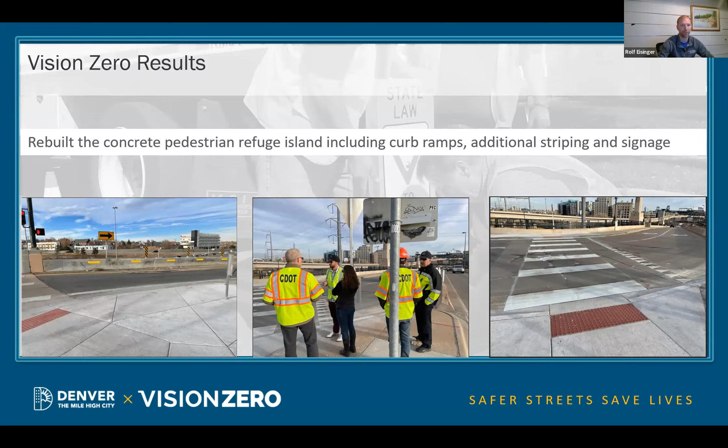In addition to that, our photo enforcement program led by DPD currently has had a significant increase in safety. The new bill that is out, or law, could provide even more opportunity to focus on some of those higher speed roadways that we haven't had the opportunity to deploy this effective countermeasure on.

Reflective backplates - this is a low cost, I'd say, safety improvement, but nonetheless helps increase visibility for traffic lights, especially at night, and especially if the traffic light is no longer working. Motorists can still see it, and pedestrians and people riding bicycles. It is a FHWA proven safety countermeasure.

Jumping into the action plan here, with Denver Moves Everyone and all of the public involvement and the planning that went into creating that document, we used it as an opportunity to align planning efforts to update our Vision Zero action plan. Denver Moves Everyone helped us seek quite a bit of public input, which led to the recommitment of Vision Zero, and zero is the right number.

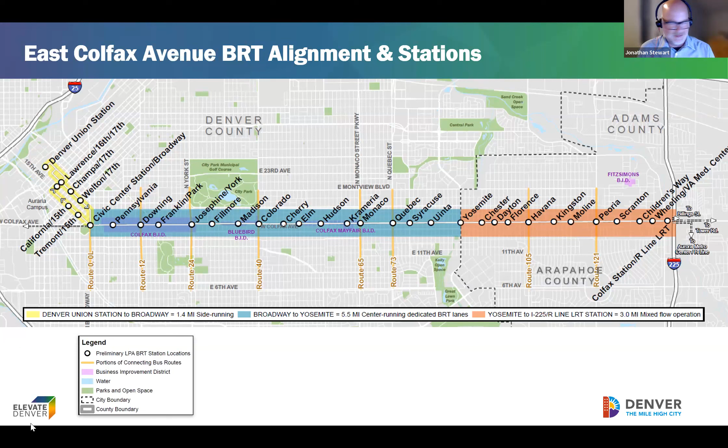These are some of the key features of having a bus rapid transit, and these are all different improvements to help a bus move faster through a city. All of these little things add up to lots of savings, about 30 minutes of savings time if you're moving through Denver. One of the big ones is called transit signal priority.

There's a little device on the bus, and when it comes up to a traffic signal that's getting ready to turn red, it will hold off on turning red and stay green for just enough time to let that bus get through the traffic signal. That helps to speed up the travel time.

Also, there's level boarding, so the bus stations are elevated up. There's BRT branding. Fare collection happens at the bus stations instead of on the bus, so that allows people to get on and off a lot quicker. We have bus-only lanes, and the plan is to have specialized vehicles as well—we're going to have the 60-foot accordion style buses for this line.

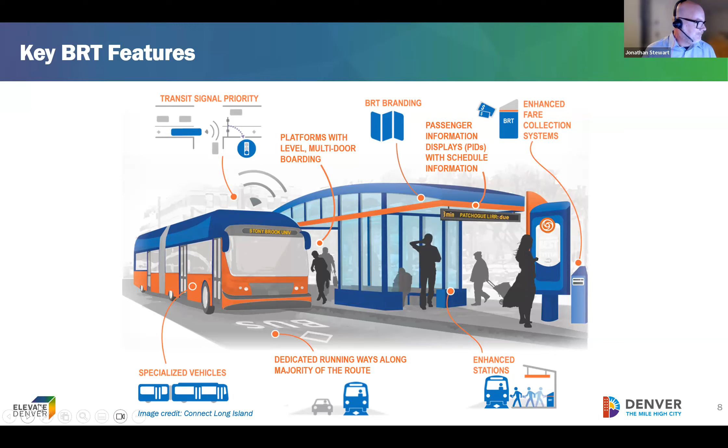Let's move on. So the Colfax Bus Rapid Transit Project is the first of several BRT lines planned in the area. We have Colorado Boulevard, Federal Boulevard, Alameda, Spear, and a number of others.

I know that Colorado and Federal are being prioritized—those are next up to get built. I think maybe Federal quicker than Colorado, although we'd have to ask our friends at CDOT for that specifically. But this is part of a plan to prioritize transit even more in the Front Range area. Let's go to the next slide.

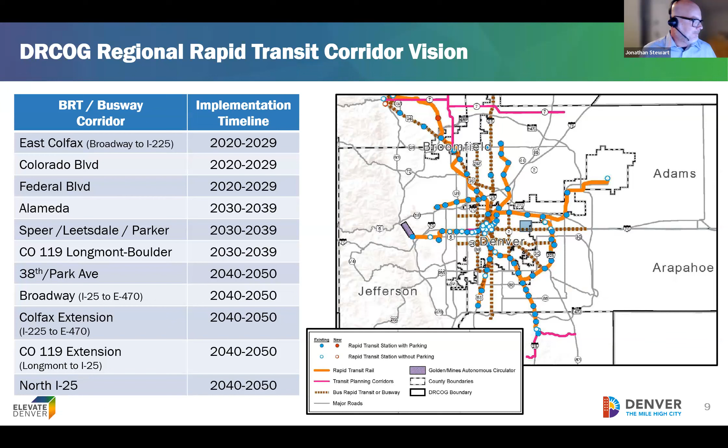So where is this project specifically, the Colfax BRT project? We've been working pretty hard going through an FTA funding process. We identified the ability for this project to join the Small Starts program by the Federal Transit Administration, and as part of that we had to go through an environmental review—that's what the NEPA review is called.

We're still going through that process now. This past August, August 2022, we turned in our rating application to FTA, and in March of 2023 we received our rating from FTA. We received a high rating. There are over 40 projects in the Small Starts program, and we were one of 3 to receive that high rating. We think that's a really big deal, because it means FTA agrees with us that Colfax is a great candidate for having a bus rapid transit project.

Also in July, we submitted what we call the categorical exclusion. It's a certain type of environmental review required for federal projects. This project isn't expected to have any kind of large traditional environmental impact, so we're eligible to submit for a categorical exclusion. That doesn't mean there's no environmental review—I promise we're still going through a serious environmental review, and we're still doing that now.

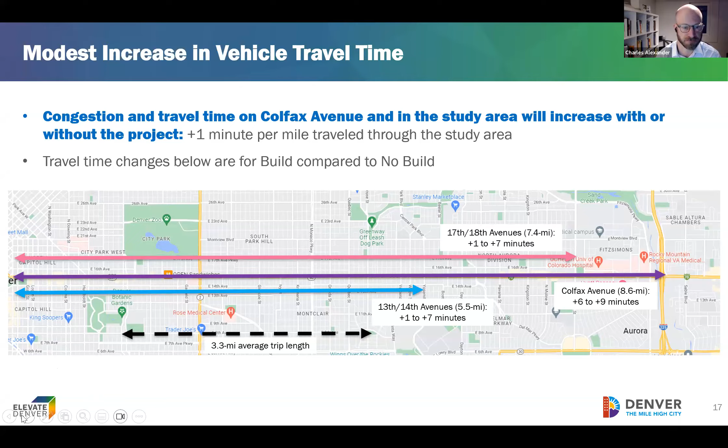One of the benefits of the project from a safety standpoint, which will also be noticed by many communities, is that we are managing access on the corridor with a median between the two directions of travel. This will ultimately manage access so people can only make left turns at signalized intersections. Many of the corridor's crashes today are related to left turns from the minor street onto Colfax or left turns off of Colfax, so the median has benefits for mitigating crashes related to left turns up and down the corridor. It also provides a point of refuge for pedestrians who cross outside of a marked crosswalk, and has benefits for transit as well.

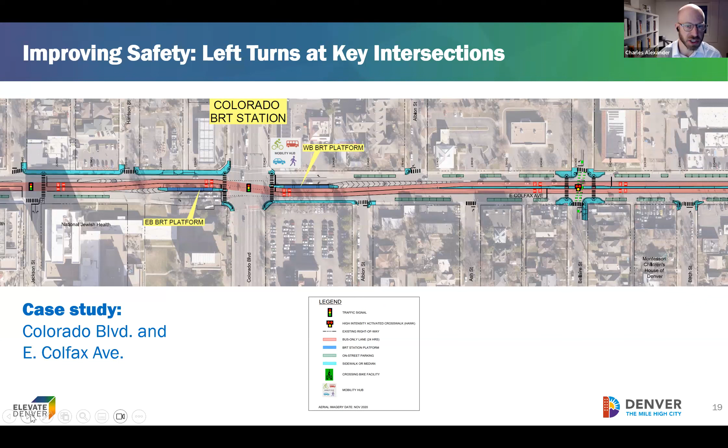This is just an image showing the configuration of the median between the signalized intersections, and in the case of Colorado and Colfax, how the left turns will be configured around the stations at many of the signalized intersections.

We are currently completing what's called a curbside access plan for the corridor. Generally speaking, the question this part of the effort aims to answer is that there are many on-street parking spaces on Colfax today, and with a project this significant, we need to rethink all of the regulations in place that affect how people use that curb. We had our most recent public meeting on this just two nights ago, working with the community to understand how we reconfigure those spaces, recognizing that in many segments of the corridor there will be a net reduction in parking spaces, particularly in the west part of the corridor from Broadway to Colorado. We aim to have draft recommendations available later this fall.

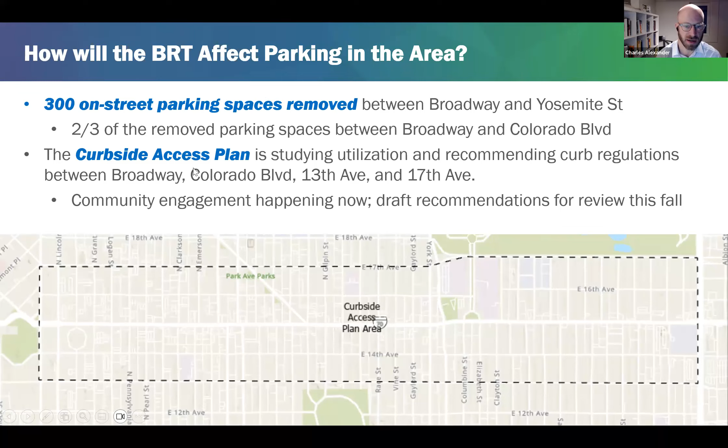Thanks very much. We had a question from Rob, which I think has been on a lot of nearby residents' minds, about extra traffic being directed to the side streets. I'll throw it to you, Charlie — you've been studying that in the plan you showed us the cover for. Can you give us a summary of how that looks and what mitigations are possible? I'm assuming by side streets Rob means the intersecting north-south streets in a lot of cases, but also parallel streets. Automobile traffic will be increasing — what's the knock-on effect, and how much? Rob noted that in other cities, when really good transit like this comes in, there's a certain amount of car traffic evaporation — it doesn't just go somewhere else, people change modes.

I think what we projected in the transportation report in terms of the shift in traffic off of Colfax and potentially onto those parallel streets — 13th, 14th, 17th, 18th — is the contributing effect that gives us that increase of about one minute in travel time through the study area. So what we put in the transportation report, and the way we analyzed it, probably represents an upper limit or a worst case. In reality, what we see and monitor over time may be somewhere between what we have now and what we think is a worst case. To a large extent, I think that will be most felt on the east-west parallel streets. The north-south streets, I think those effects will be generally less and a bit more nuanced. In a lot of cases, people using Colfax as their through corridor today, if they choose to use another corridor, that doesn't necessarily change how they choose to travel on the north-south streets to their ultimate destinations.

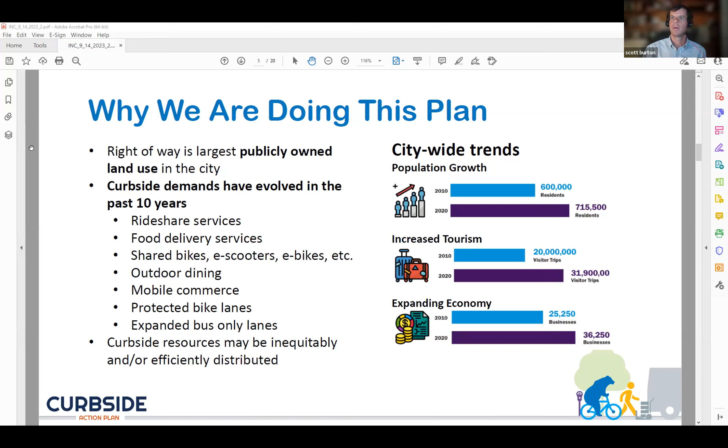So some of the project outcomes: this is an action-oriented and implementation-oriented plan that is identifying short and long-term projects. This will include pilot projects as well, and curbside priority guidance by street type and then policy needs. So that's our effort in a nutshell from an outcome perspective.

As I mentioned early on, we did create a vision statement, but today I wanted to just share our core values with you. Our core values include highest and best use, accessible and equitable, flexible and accommodating, innovative and dynamic, effective and consistent, and resilient and inviting. I wanted to share this with you just to show how our core values connect with the goals of Denver Moves Everyone.

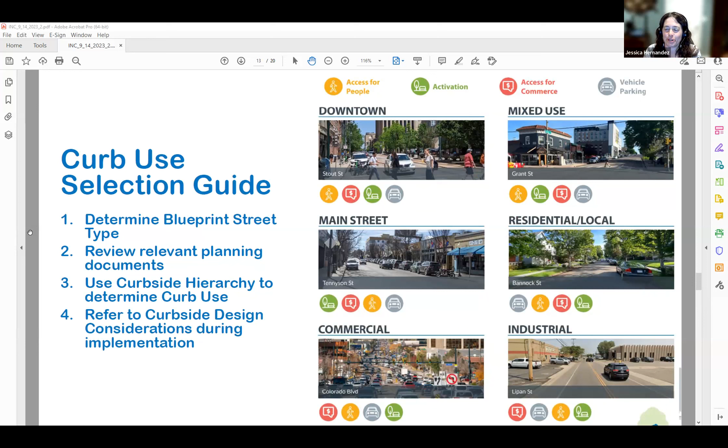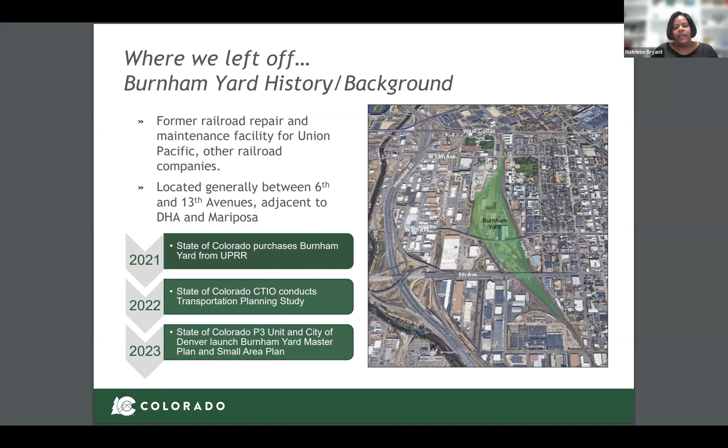Joel, I just want to make sure my slides are moving. Are they moving? Yes, it's perfect. Okay, perfect. Just making sure.

Sometimes technology is hard. Within our transportation study, one of the things we started doing over the last 10 months is looking at the technical aspects of the railroad. We have BNSF, Union Pacific, and RTD currently located on that yard. Right off of 10th and Osage is the RTD light rail line, and then you have the consolidated main line, and then BNSF and UP that utilize both of the space adjacent to that property.

This map shows you a little bit about where the current rail sits, and you'll see that it creates an island. So how do we gain access to that island, and how do we open up the opportunities for this community to really start looking into what we can do with Baker? How do we connect Baker, La Alma, Lincoln Park, Valverde, all of those different neighborhoods to this property and make it what it could be?

It's 58 acres of land, so there's a lot of land for us to work with, but we do need to start looking at what we're doing with the consolidated main line as well as RTD.

So within this study, we had 5 really clear goals that we needed to look at, that we focused on as we were looking at where we can utilize and put a preferred alternative for how these rails are actually aligned.

The first one was access and network. The main thing we wanted to look at here was to provide reasonable access to transportation facilities, but also enhance the mobility and provide operational improvements to this yard by having it open up and not be isolated as an island. This will also give community members more transportation choices as well as transportation equity. As we know, transportation has historically been utilized to divide communities, specifically communities that have been disenfranchised. That is one of the main things we want to ensure does not happen in this redevelopment effort.

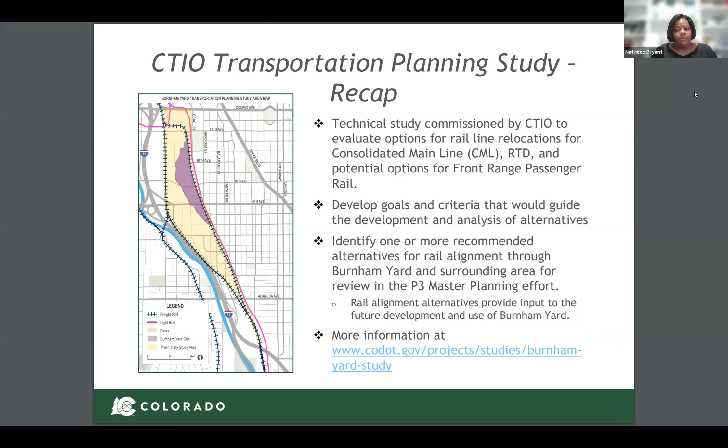We have a lot of different options that look through some of our different rail alignments, and those are not going to be inexpensive, so we need to go after grant dollars. We partner with the City and County of Denver on a regular basis to ensure we are connecting where necessary and going after grant funding. We have a lot of IIJA dollars we can access right now, so we need to take advantage of all the federal funding sources and local government sources we have to improve and implement this project. That's another thing that's really important to us.

I'm going to show you three alignments we've looked at. We have stakeholdered this slightly with neighboring businesses as well as community members. These are still in draft form, so I want to be clear about that. There are things we still need to look at, but I do want you to see what we've seen so far.

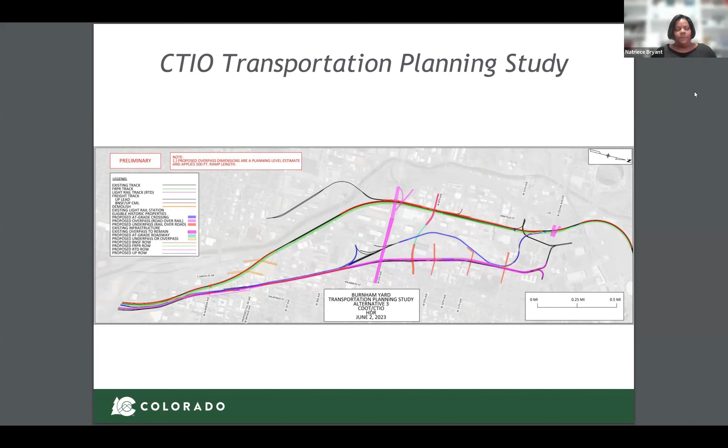And then we also still have NEPA, so we need to feed this information into the consultant that would do the NEPA study. We're still working with the City and County of Denver, and there are a lot of moving aspects happening at the same time that we have to make sure we collaborate on. One thing that was really important to our team is to ensure that when someone comes and talks about Burnham Yard, we come as a team effort.

You'll see that we have team members from both City and County of Denver on this call, as well as our consultant, because the community doesn't understand if it's city government or state government. They just see government coming and talking about a project. So it's really important to us to have that connectivity when we're talking together and coming to community together, so that there's no message lost in translation as we're moving forward.

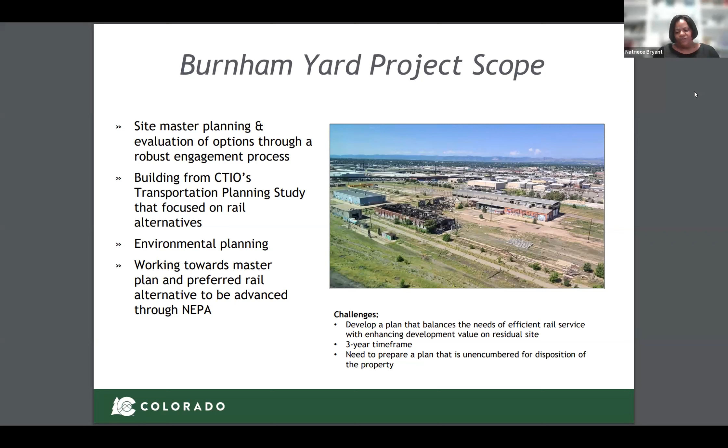We are in the beginning stages of this master plan project. You all are one of the first groups we're presenting to as we start moving into the master plan process. We have another community engagement event next Thursday, on the 20th, that really starts to dig with community into our goals and objectives and how we're going to move forward with the residual site.

It's one thing for government to come talk to folks about what we're doing. It's another thing for us to be in community. So you will see us utilizing stakeholder engagement through community navigators, those trusted voices that already understand the community and are not coming as government sources to talk with folks. We're also utilizing interpreters and translators, using different forms of outreach and education to understand what the needs are in the community.